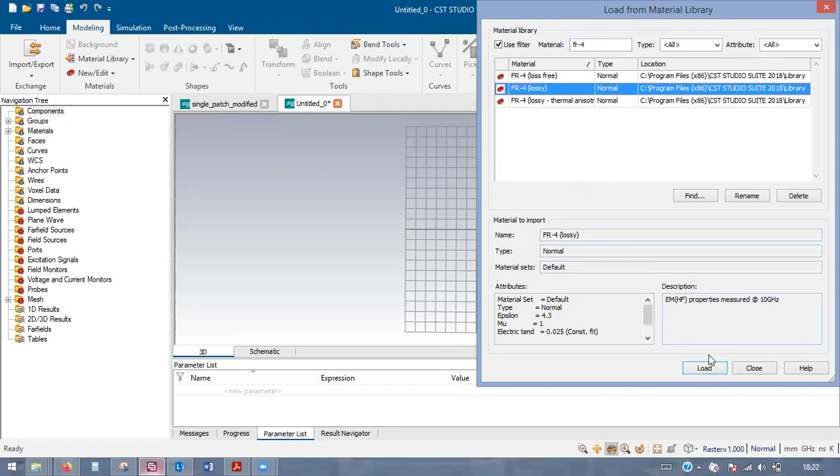So for that, we'll start with the substrate, whose width will be minus WS by 2 to WS by 2, length will be LS. This will be height of the substrate. It can go in negative direction. For material, we can load it from here: FR4. Click on preview. Width of the substrate is 45 mm, length is 45 mm, and thickness is 1.6 mm. Click on OK.

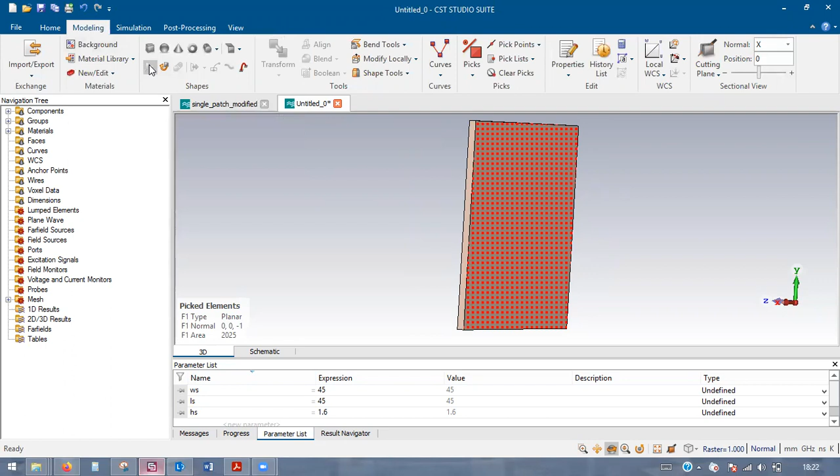So for ground, we can select the bottom substrate. Just use the operation called extrude. Give here height as the height of the conductor. Change material to PEC. Click on preview. Thickness will be 0.035 mm. Click on OK. So we can see substrate and ground is done.

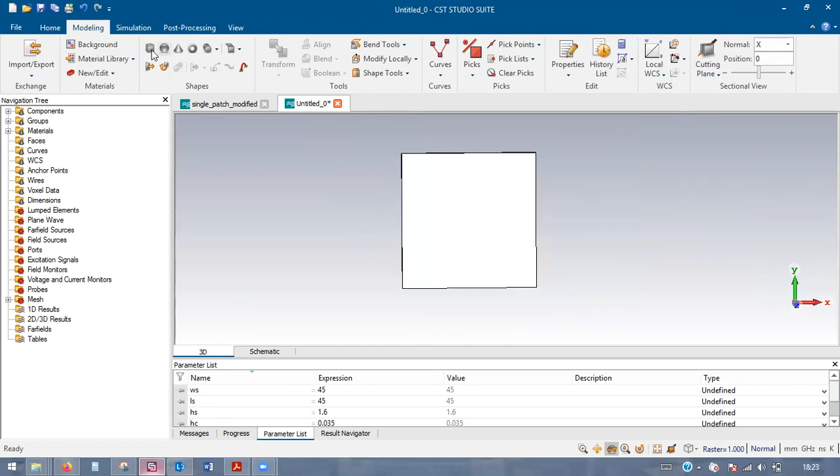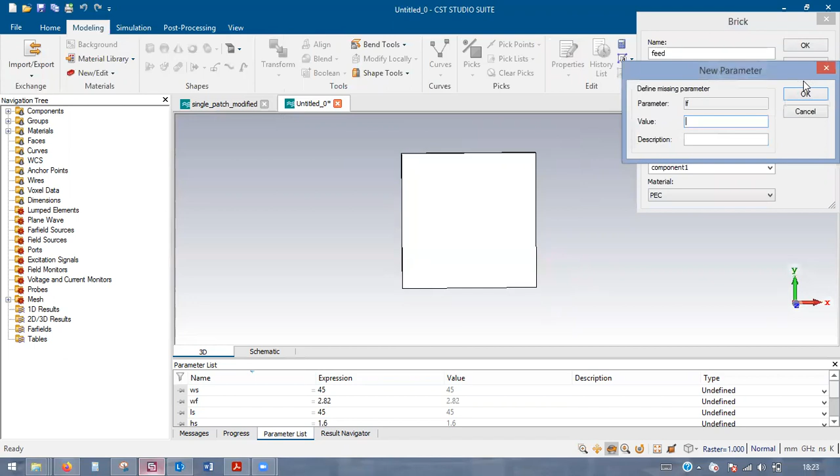Now we'll design the feed. For feed, you can bring it here. Name as feed. It will go from minus WF by 2, which is the width, minus half on left side, plus half on right side. This will be the length of the feed. Height will be height of the conductor. Click on the preview. Width is 2.82 mm, length is 10.07 mm. Click on OK.

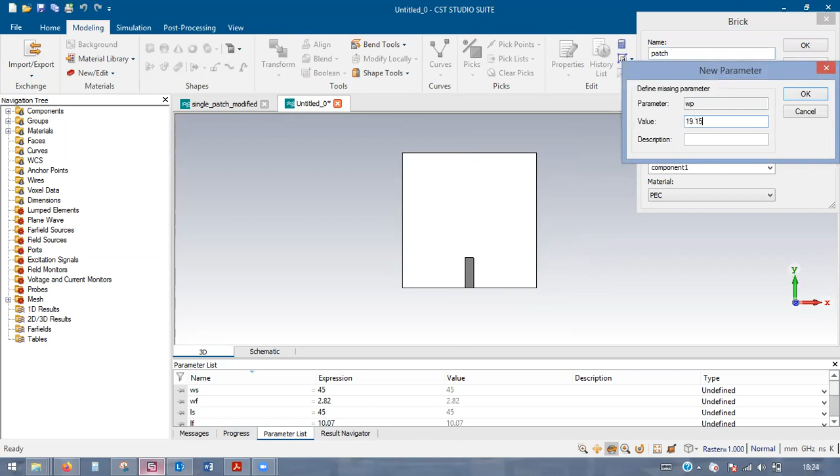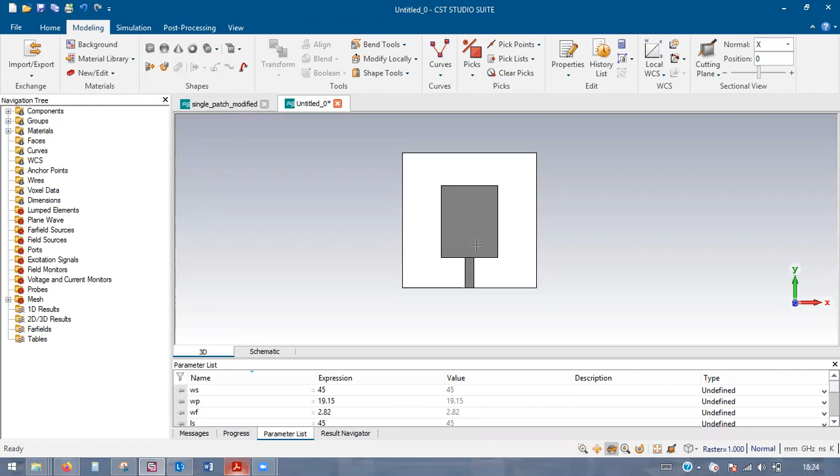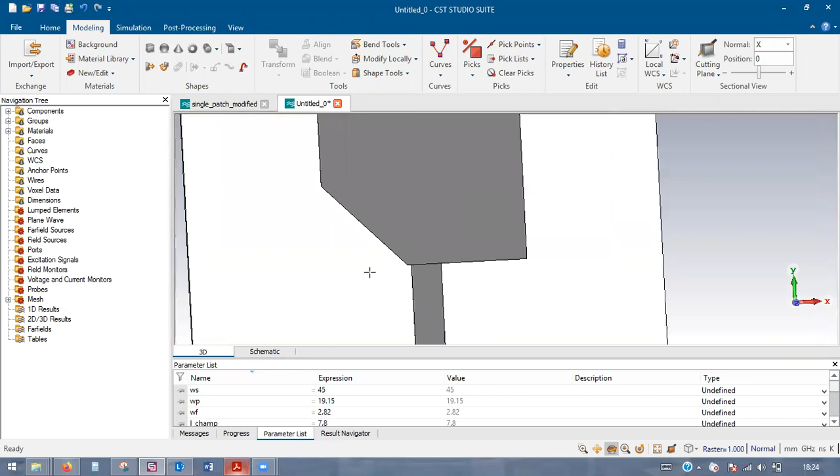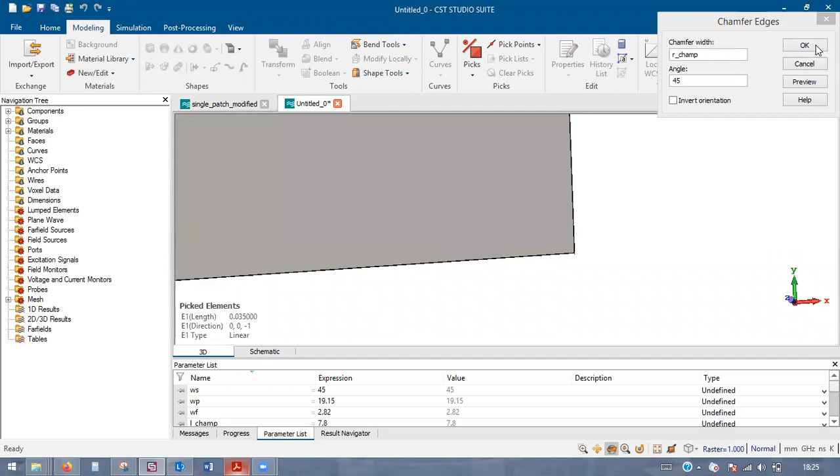Now we'll go for etching. For each, this edge needs to be bended. We can give here a parameter also, like L_champ in mm, which will be 7.8 mm. Same way it should be from right side. Select the edge, then come here, use the operation called chamfer. The angle of chamfer is 45 degree. Now this will be R_champ, R meaning right side. Click on preview. This side it should be 8.5 mm.

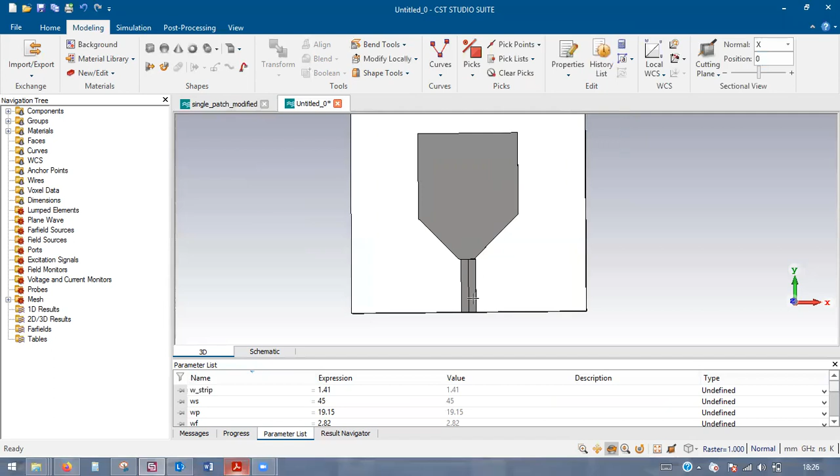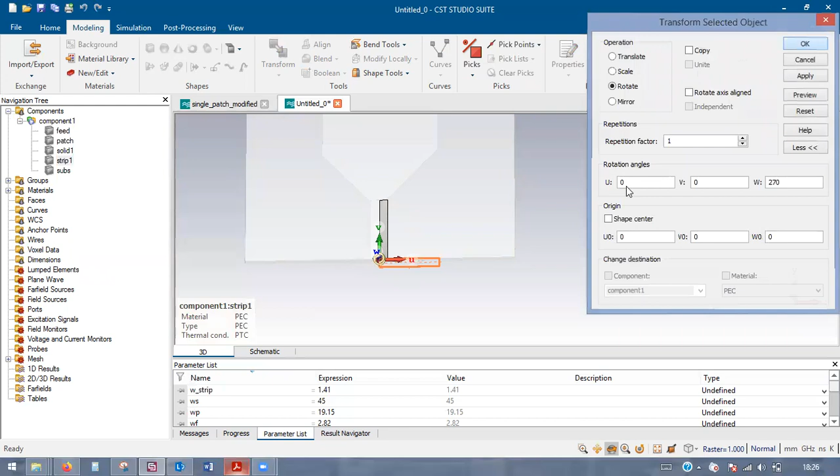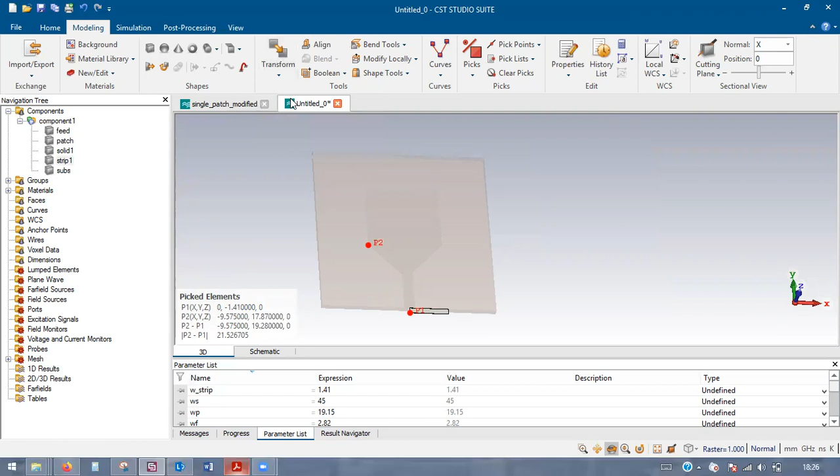So for that, we need to select the center. We need to rotate this around 90 degree or 270 degree on this axis. Now we just need to translate this slot by selecting this point first, then secondly over here, then double click on the strip, then use the operation called translate, and click on OK. Now you can see it has been done properly.

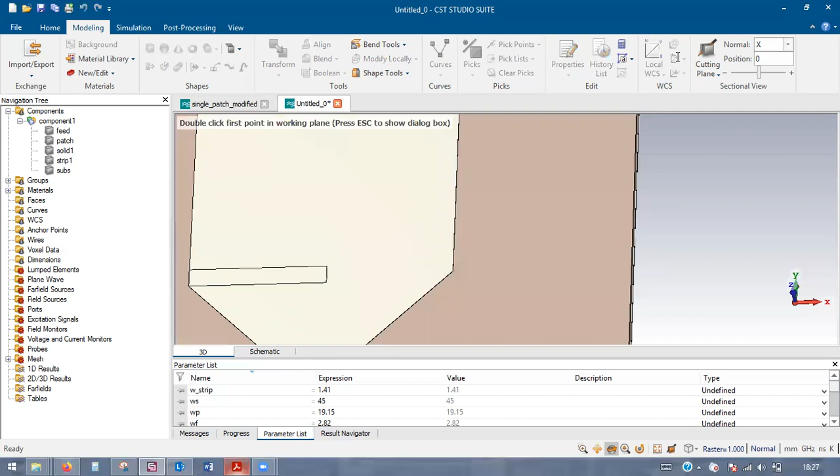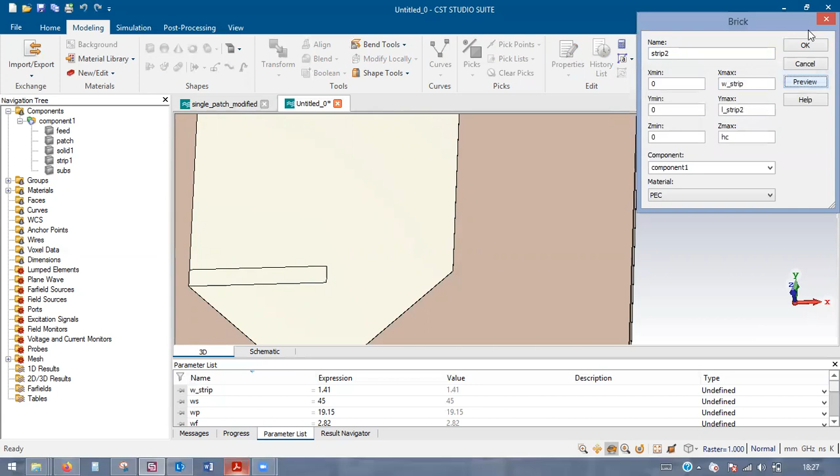Now the same sequence is there. We'll create another strip here, strip 2, whose width will be W_strip. Width is same for both, so length will vary. It will be height of the conductor. Just click on the preview. The length of strip is 10.85. It is done.

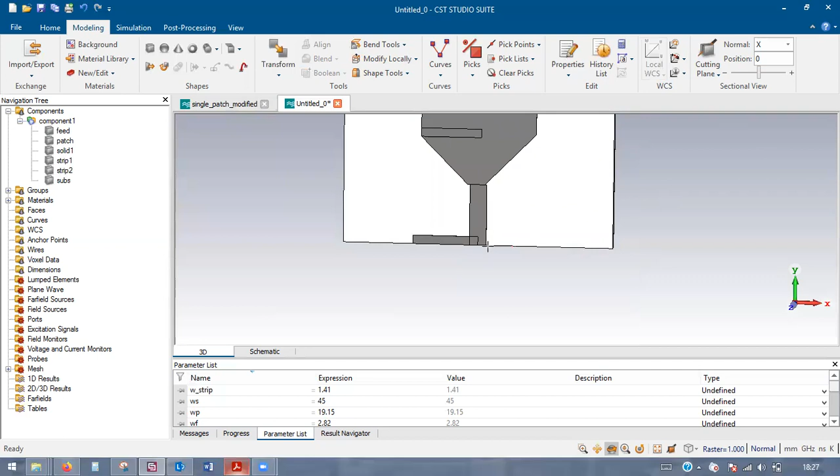Now again we need to rotate this. Again select this, bring UVW into the picture, use the operation called rotate. Again 90 degree on the left hand side; any side is okay. Now we need to translate this from here to here. Then select the strip, use Ctrl T from the keyboard, click on OK.

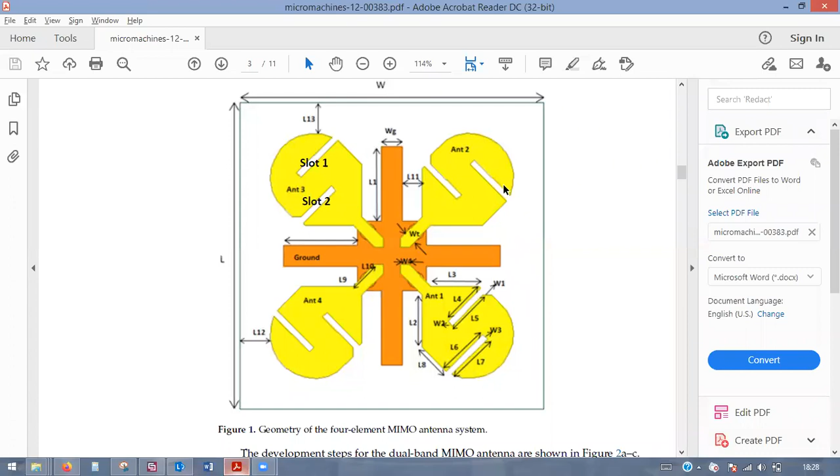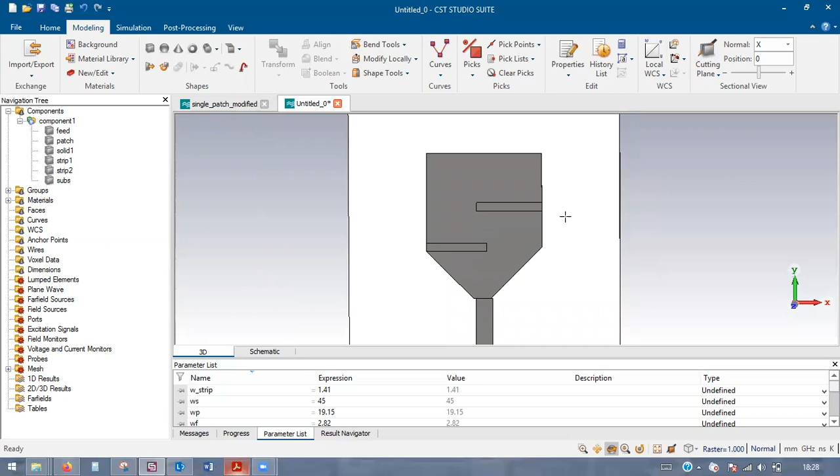Now we need this slot to be on the upper side here. Before using the boolean operation, you need to translate this strip along move_slot. Click on OK, give some variable. Then we can use subtract operation. We can delete both the strips. Now slot has been done.

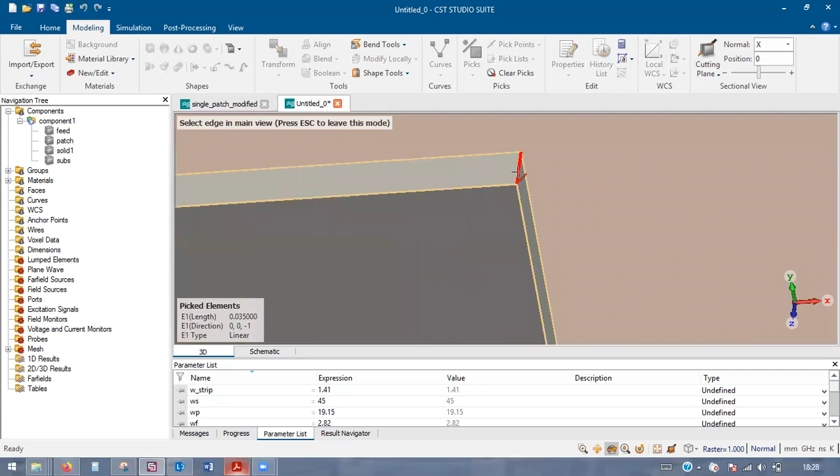Now we need this to be bended. Select both edges by pressing E from the keyboard, and use the operation called blend. Give here radius, which is around 7. Click on OK. It is done.

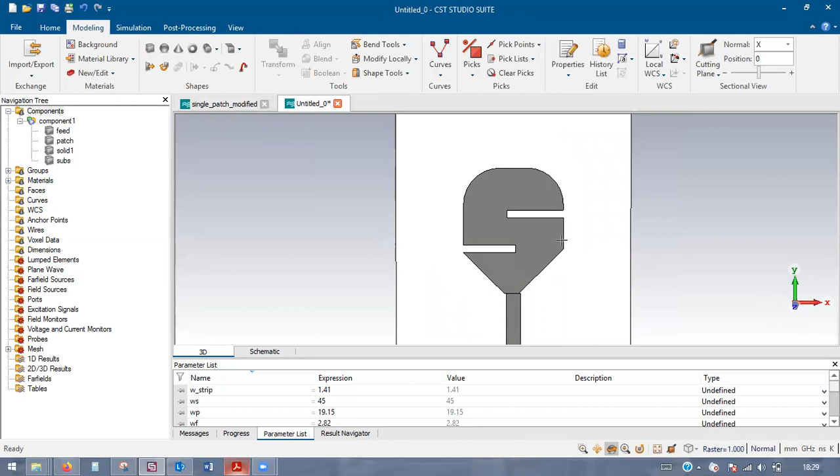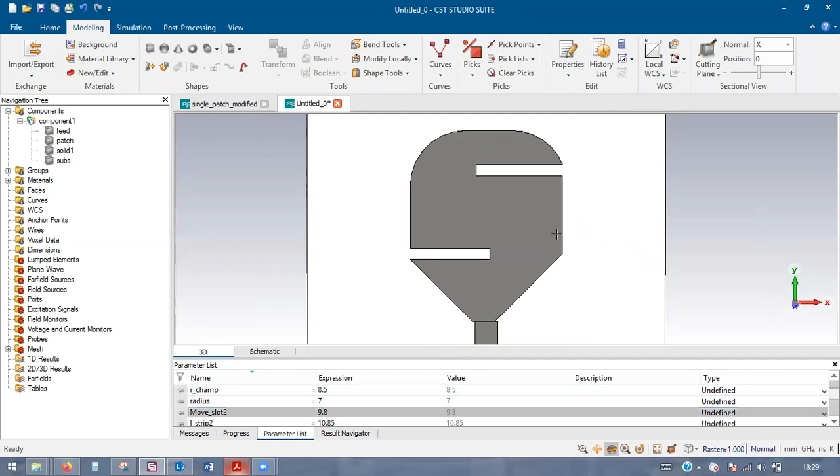Now if you see, this edge needs to be 9.8. Currently it is 6, so we need to move it 3.8 mm. We have used the operation move here, move slot. This should be increased to 9.8. Now it is perfect, you can see here also.

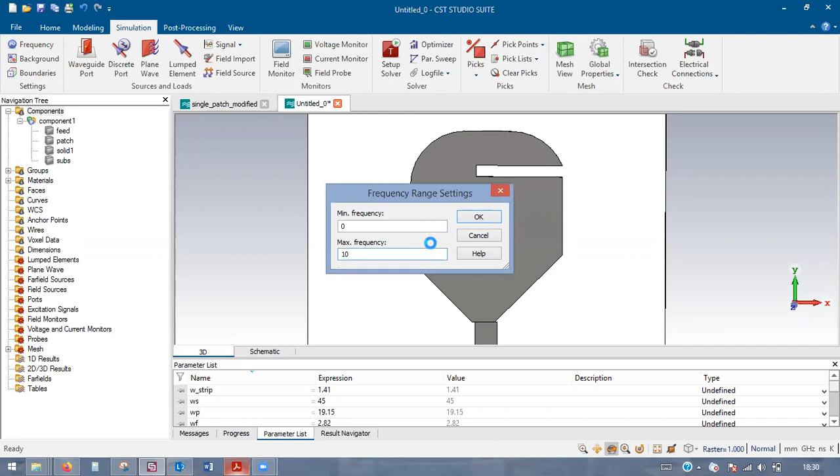As the resonating frequency is 6.7, we can set the range from 0 to 10 gigahertz. Click on OK. A boundary box will be created. One thing is we need to excite this with the help of a port. Select the face here, come to home, macros, solver, port, calculate port extension coefficient, calculate, construct, and close.

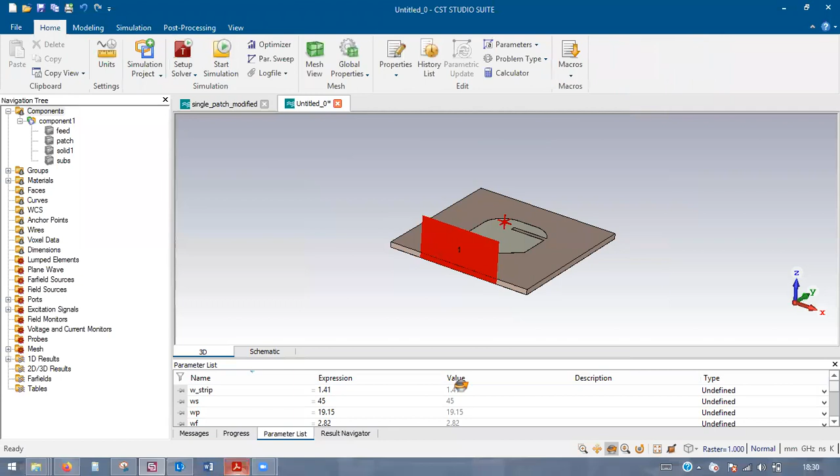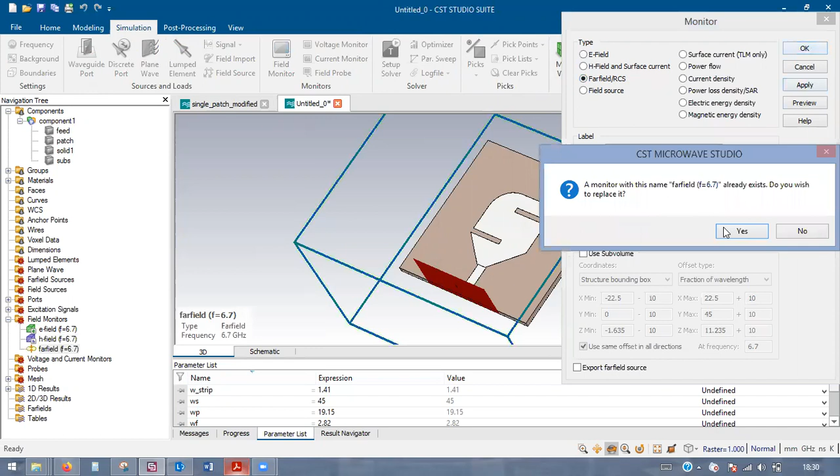You can see here our designing is done. For radiation pattern, come here, simulation, far field, and give the frequency of 6.7 as we know the resonance. Then click on apply. For magnetic field and surface current, for radiation pattern, gain and directivity, select this, give frequency, click on apply. Now we can start our simulation. As I already have the result, I'll show you here.

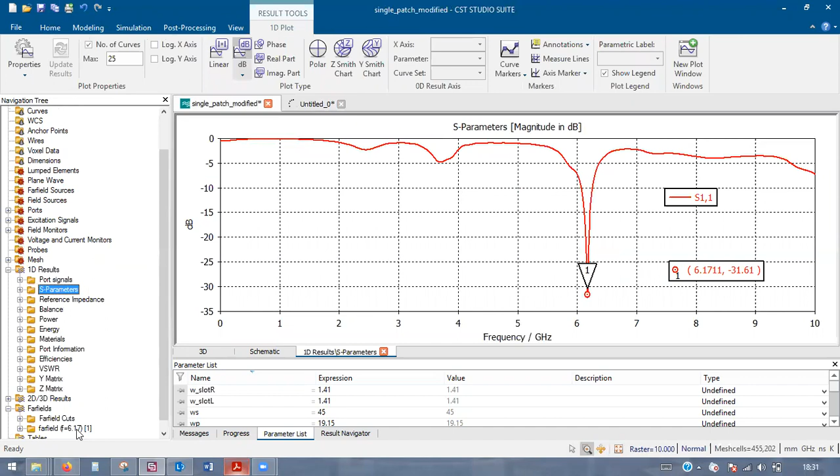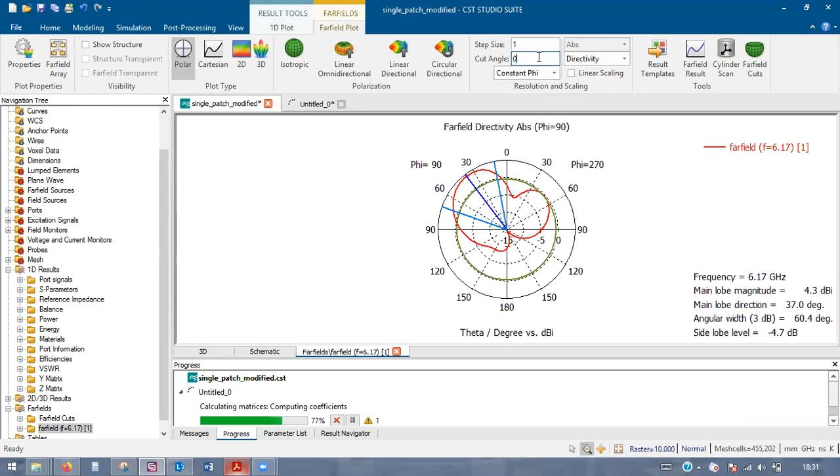For E plane and H plane, you can come here to polar. You can check by changing cut angle 0 to 90. You can switch from E to H and H to E plane. Here you will also get the main lobe direction, which is tilted by 37 degree. You will get 3 dB beam width also, 60.4.